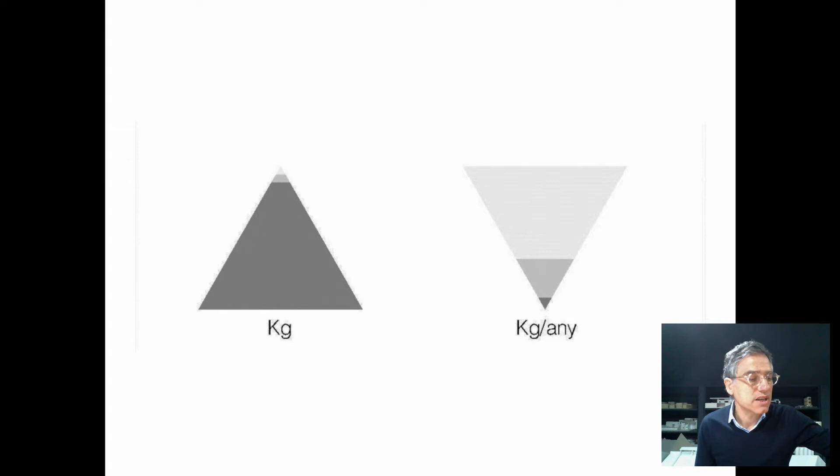But if you do the same calculation for the same house, not for an instant or just a moment, but for a year—which is the meaning of 'any' in that diagram—the calculation completely becomes the inverse, because the solid part of the house is always the same, but the liquid part is renewing all the time, and the same with the gaseous part, like the air, which is changing all the time. Maybe it's a silly diagram, but it's a good example to express the importance of time, not only in thermodynamics but in everything. In fact, without time, nothing exists.

And I think that if you introduce the idea of time in architecture, maybe we are getting closer to what is the invisible in architecture. Because through photography, I have the sense that you're just catching the instant, just catching a moment. And for me, this is the key—there's something out of the photograph that is difficult to define, that is about the invisible, but it's about time.

Just to present some vectors that I imagine can express the idea of time in architecture—for me, the first vector is people behavior, people performance. People performing in architecture is the first concept of time and architecture, which has high importance in the aim to define what is invisible in architecture. People performing is a very important part of that invisible part of architecture.

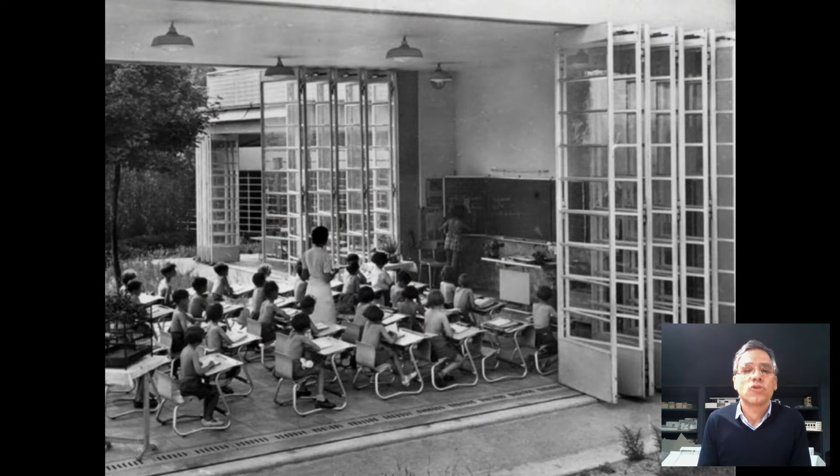Natural conditions performing—wind, breeze, natural conditions and physical phenomena performing—is also an important part of that invisible in architecture. And of course, architecture performing with physical phenomena is the third part that, as a triangle, maybe can define a little bit the vectors of time, and are close to being the sides of this invisible in architecture.

People performing is, for me, the first. When we are projecting, we are not projecting objects—we are projecting people having experiences. We are projecting the performance of everything. That's what we are projecting.

Then we define conditions, and at the end we take decisions basically about matter and geometry. We are organizing matter, but the projection, the preview that architects are doing through the discipline, is about the happening of the experience.

And in fact, not now, but at the beginning of the office, we were more or less well known in Barcelona because it was supposed that we were an office concerned about sustainability—but not because we were using passive and active strategies, or biospheric materials, but because we had a previous basic strategy about sustainability based on the idea of the use of the object. What is sustainable or unsustainable is not the building itself, it's how we use the building.

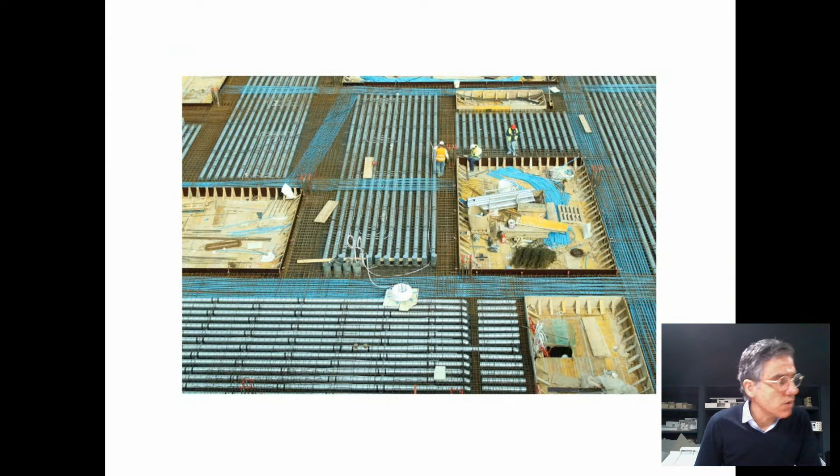Not only in outside spaces, which are an easy way in a warmer climate like ours, but also through sun gains and so on. The third aspect I was talking about is building performance, the building taking advantage of its natural condition, its nature. In the nature of certain structures there is inertia, so use the inertia. In the nature of certain materials there's natural insulation, so use that.

So by using the nature of the building, you manage physical phenomena also in that third aspect of the performative in architecture. These three parts that are talking about time are also talking about the invisible. Of course, there is the memory.

If we are talking about time in architecture, the fourth vector is the idea of memory. In our case, and I'll talk about that a little later, our relation with heritage, our relation with memory, our relation with the pre-existing, is very based on the idea of the attributes in the pre-existing. The first step in order to give value to the pre-existing, to the memory, is to ask that organized material that is already there to perform, to be part of the new construction.

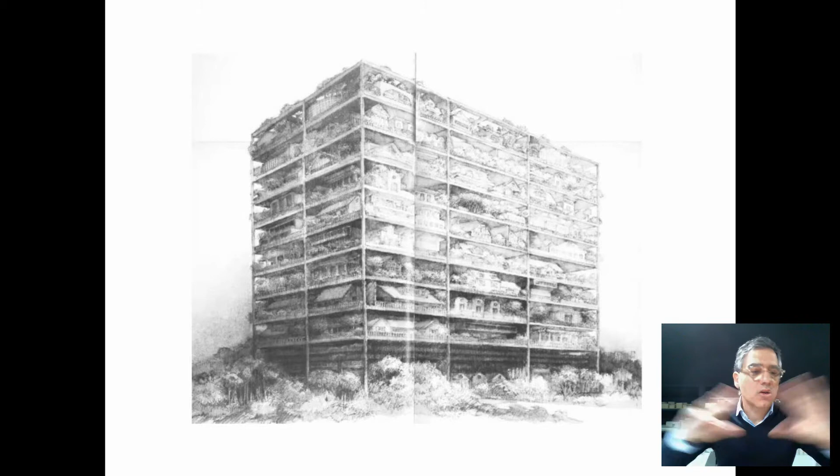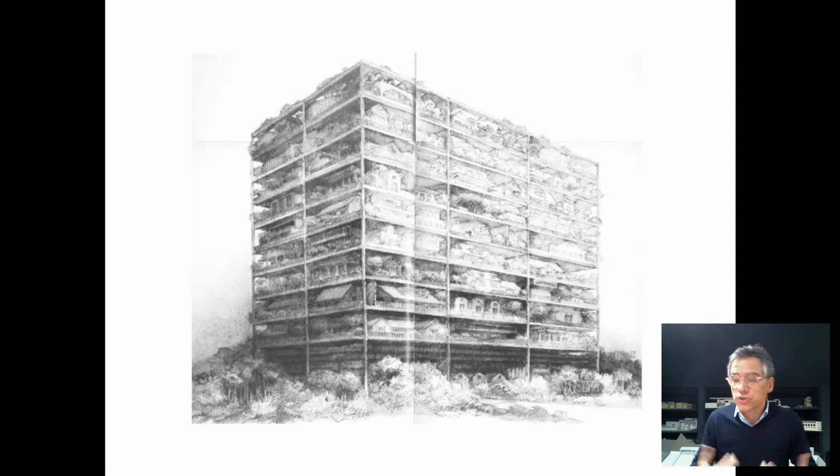I'm sure everyone involved in the discipline is always getting demands and managing availabilities to give a solution, to give an answer to those demands. In this difficult, complex equation that is the projection process, we are using construction and organized matter to arrive at the solution.

What I think is more specific about our personal approach is that from the very elemental parts of the buildings—structure and envelope, a structure to support the living performance, an envelope to protect the living performance from the outside—we ask those very elemental parts to perform in as many possibilities as possible. We ask the structure not only to support people, but also to produce comfort through its inertia, to produce acoustic comfort through its geometry, to manage natural light, and to hold the pipe system.

So we are asking the elemental parts to use all its behaviors possible, because the behavior of the structure is not only to support. If you design that structure through deeper research, you will find a lot of behaviors, a lot of attributes that can be assumed by that part of the building. Of course, we're not always able to answer all that demands with these two basic parts, but we try to.

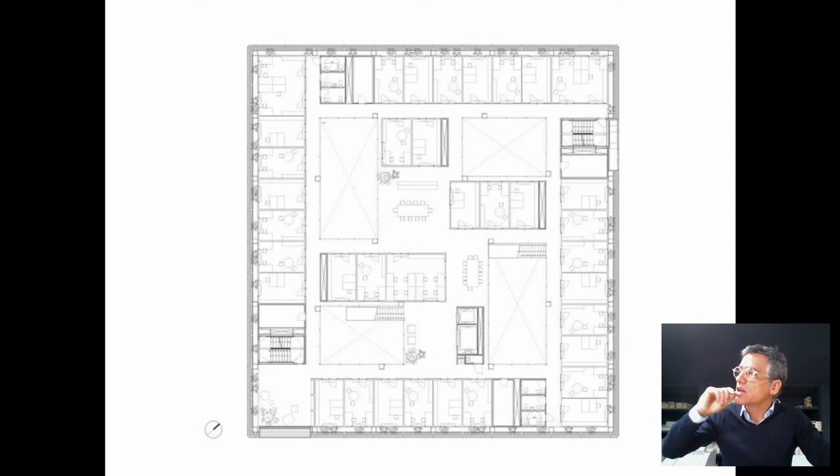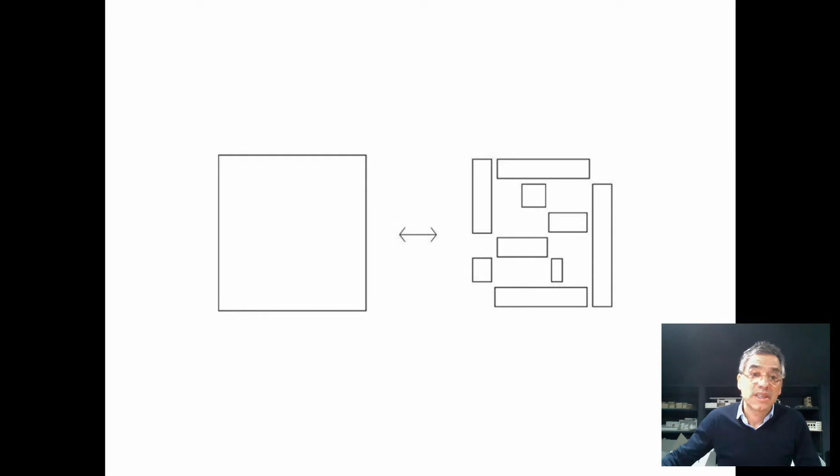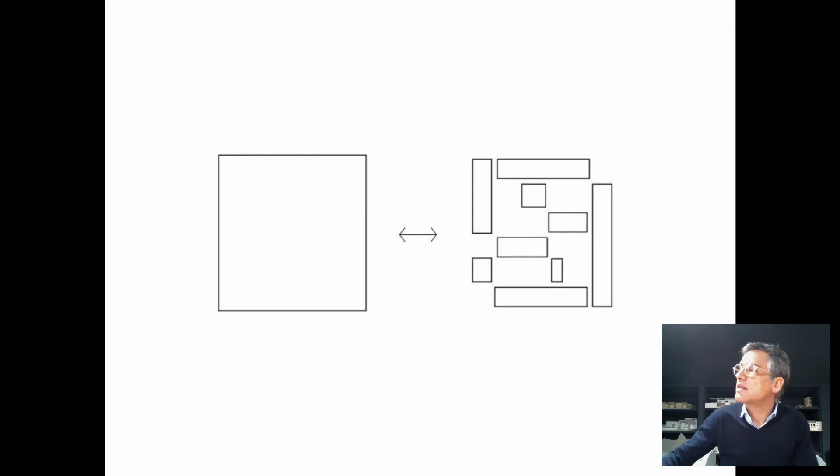This is just to explain a very simple concept, based on the idea that in wintertime it works as a very closed box, getting as much sun gain as possible, and in summertime the envelopment works as a porch. It becomes completely open, turning into that box-in-box system where the skin almost disappears, in order to produce a high level of cross ventilation. So in summer it's completely open, also working as a shade system. In winter it's closed in order to become a greenhouse.

So this is a clear example of the performatics in building, the performatic part of construction. Not of architecture, because performatics in architecture is about people, about natural conditions. This is a clear example of the performatic part of the construction.

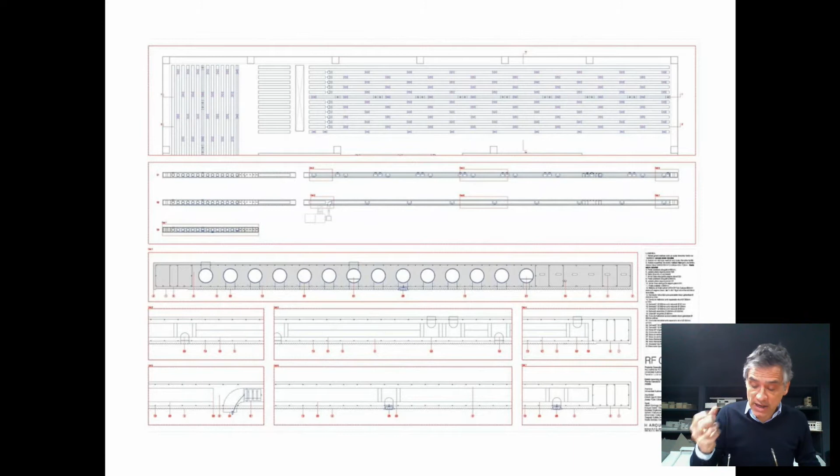So the structure, which is a heavy concrete structure - we assume that the building has these two parts: the structure, which has to be there for 100 years, to have a good relation in terms of embodied energy. And on the other hand, the envelopment as something easy to be renewed, easy to be changed in the near future. But the structural part, that heavy concrete structure, is not only there to support people.

It's also there to hold the pipes that renovate the inside air, which also helps make it lighter but with a high level of inertia, because this is a 40 centimeter slab, and that inertia helps stabilize the inside temperature, along with all kinds of pipes for other systems.

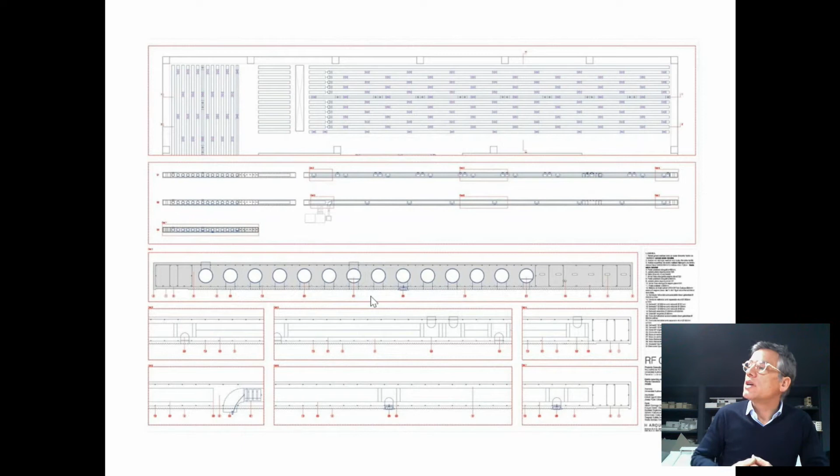It's just to understand that idea - it's not just a slab, it's also a geometry that, because of the irregular surface at that site, helps not only with inertia - this silhouette gives double surface area in terms of heat interchange for the inertia - but it's also helping to absorb a bit of the noise.

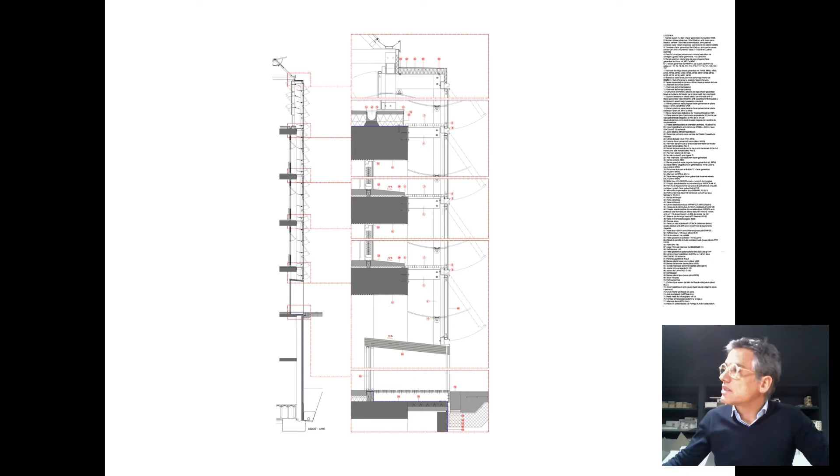And on the other side, that skin, that envelopment, which is the other elemental part of the building - it's not only a rainproof system protecting you from the rain, it's also a system that works as a greenhouse in winter, works as a shade in summer. It can be open, it can be closed. It's producing those situations, but also producing those moments.

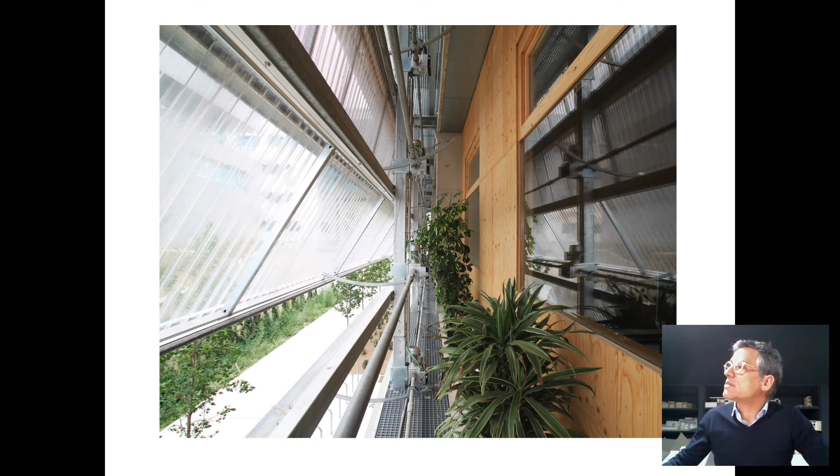Here we can see how the slab, because of the texture, becomes not only better in terms of the inertia system to stabilize the indoor temperature, but also helps absorb the excess noise.

The greenhouse became a real greenhouse at the highest level, because I haven't explained that this research center is about that kind of technology - it's an environmental research center, so they do that kind of fun research. So the greenhouse effect became a real greenhouse on the top level.

As I've explained before, our position in front of heritage is that, of course, we are concerned about composition and about the cultural dimension of heritage, but our first approach is always trying to discover the real attributes, the already-there attributes of that organized matter. I sound a little like a surgeon, very cold, but I have to say we also have that emotional approach to heritage, while being as objective as possible in order to understand its real attributes, to help it become part of the new organized matter that will be the future building.

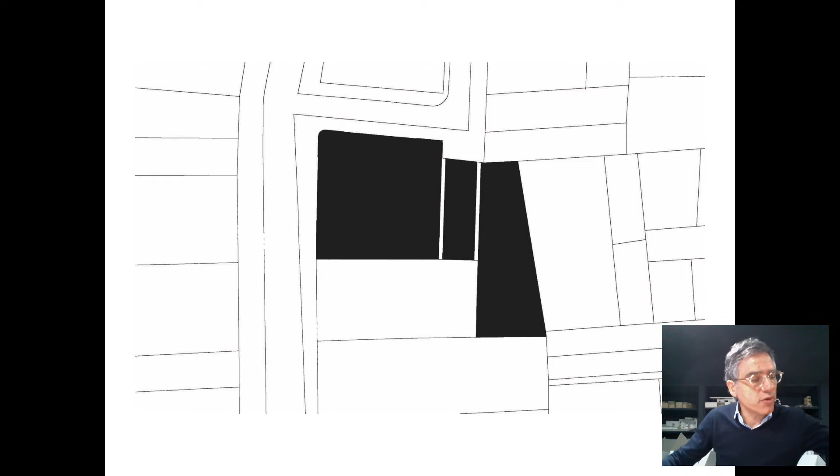In this case, this is an old cooperative building for workers in a crowded neighborhood in Barcelona. Apart from the historic attributes, the beautiful history that it was made for workers, by workers, paid by workers, it was also organized matter able to work in terms of structure—the walls were still able to hold up, to stand the new slabs, maybe a new roof, and so on.

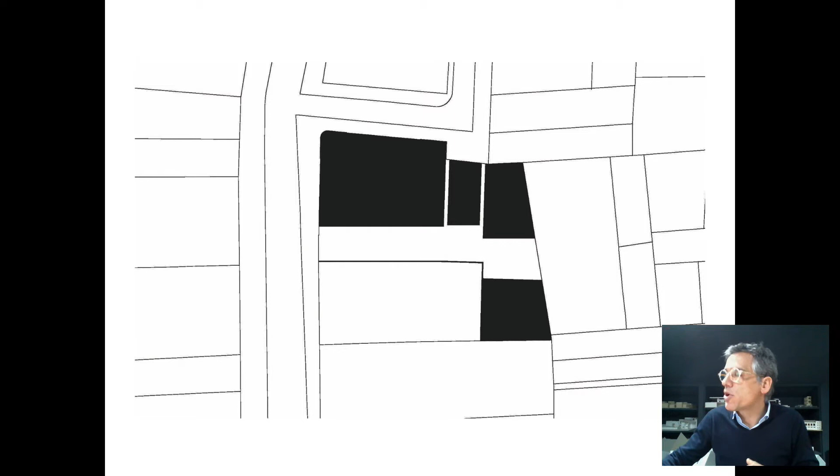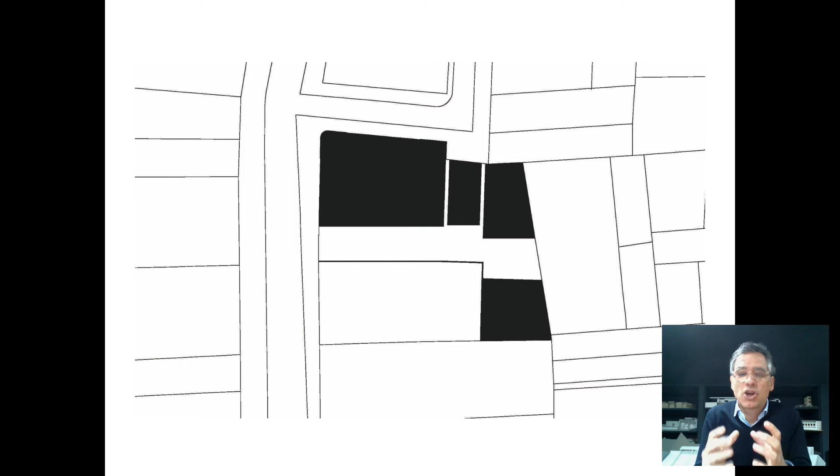So the first question wasn't about history. It was about what part of the building could already assume new heavy programs, new weights. From that, the first decision was to demolish a part, not only for structural reasons but also geometrical reasons, because geometry is also an attribute of heritage—geometry in terms of whether, because of size, the heritage is able to assume that program or use.

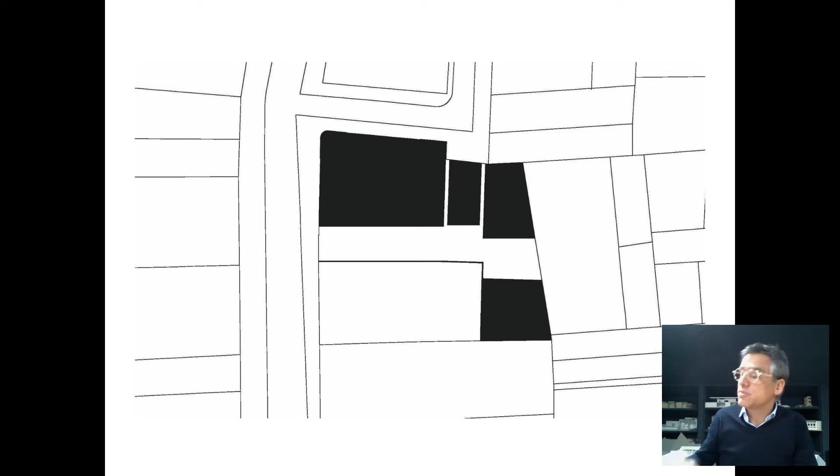So from those two approaches, structural performance and geometrical attributes, we decided to demolish that core, that central part of the building, producing a new patio to completely change the circulation and the behavior in terms of thermodynamics, while keeping the spaces still able not only to support people but also to assume new uses as a theater, a small concert hall, multi-purpose halls, classrooms, and so on.

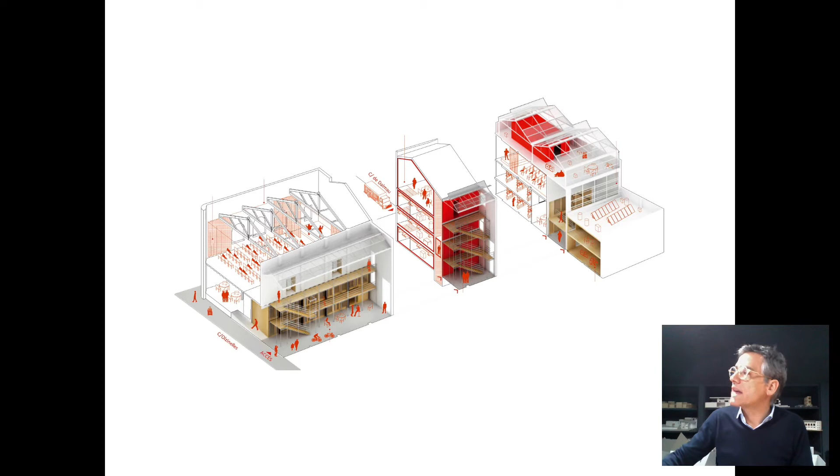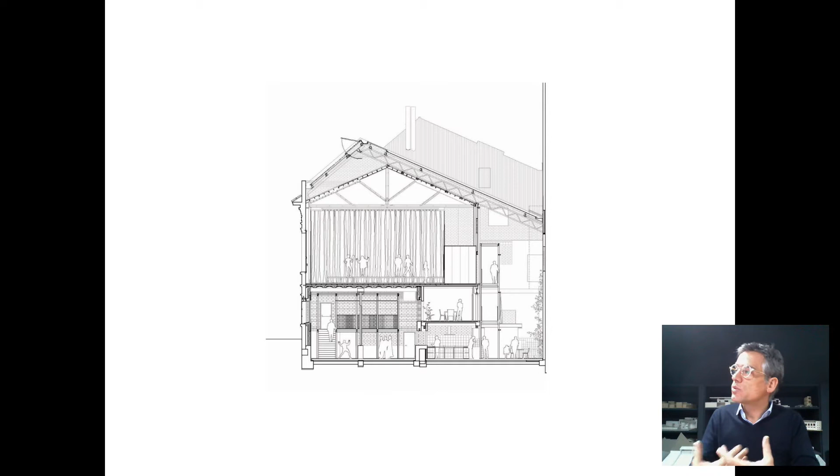This is the section where we can still see the original parts on the left side and the new patio covered by a bioclimatic roof, producing intermediate spaces in symbiosis with the indoor spaces. The theater has to be absolutely insulated in terms of noise, but the primary air of the theater goes to the intermediate space to produce natural convection, because the roof works as a natural engine.

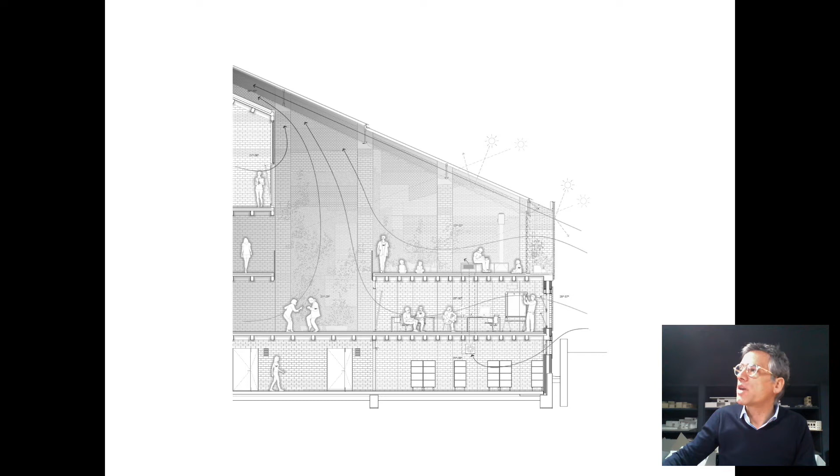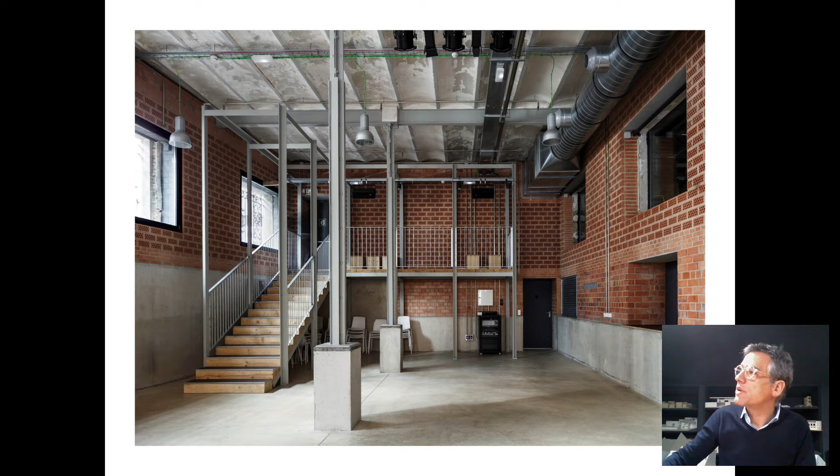This is the kind of intermediate space we are producing by demolishing part of the building—absolutely bioclimatic spaces working by natural engines. This is a beautiful experience in the very center of Barcelona, and we've been honored with several prizes for this building, which is called La Lleialtat Santsenca.

The intermediate and the indoor—this is the old main hall in the original cooperative building, which has now become a theater that needs a lot of curtains to close everything, but in terms of geometry and structure, it's still able to support the new use.

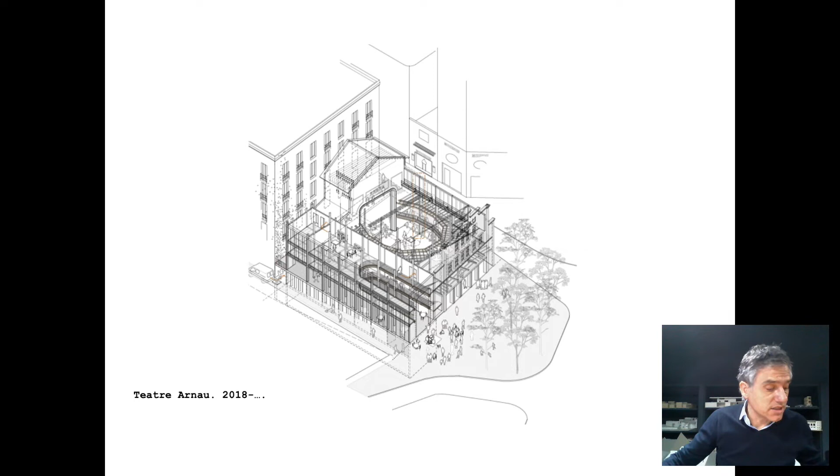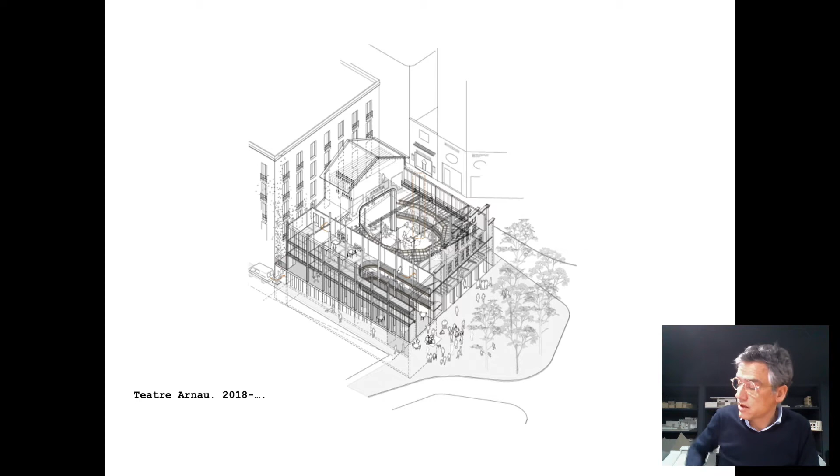Now we have finished this project for a new theater in an old theater in Barcelona called Teatre Arnau. Because of the pandemic, the process has been stopped. We're supposed to be building right now, but it's been halted because of the crisis. We don't know what will happen in the future, but I think it's an interesting project in order to ask something else of that preexistence—to ask it to also perform about this invisible, producing a dense atmosphere.

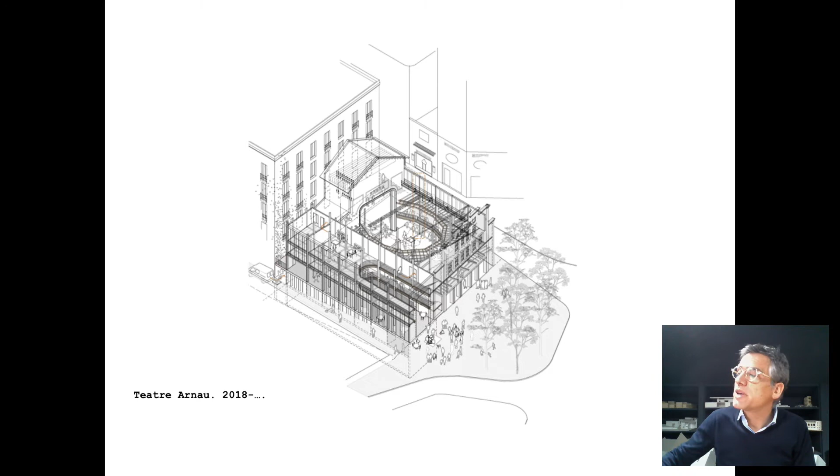In this case, it's not about structural performance, because the structure of this building—a very famous theater in the old theaters avenue in Barcelona, Paral·lel Avenue, close to the port—was once an avenue full of theaters, music halls, and cabaret places. But the construction system for those theaters was very basic.

It was very close to the kind of construction used in port logistical buildings—very simple timber structures with light steel beams, something very light that was built in a short time because of money and legal concessions. The Teatre Arnau is the last theater still standing on that famous avenue in Barcelona.

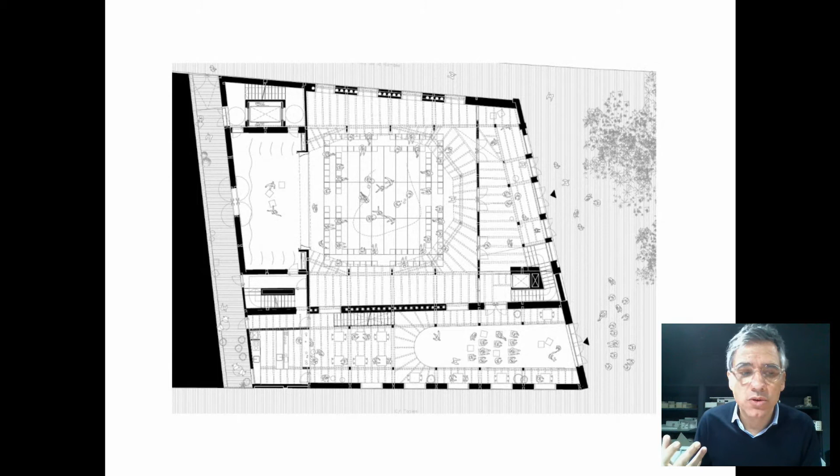So we were very proud to win the competition, and our project was basically to get a new use for the timber structure, which is characteristic in that kind of buildings. But as the timber structure was absolutely out of order and not able to be used again to support something, we decided to reuse the timber structure, the wood beams and so on, in order to produce two things.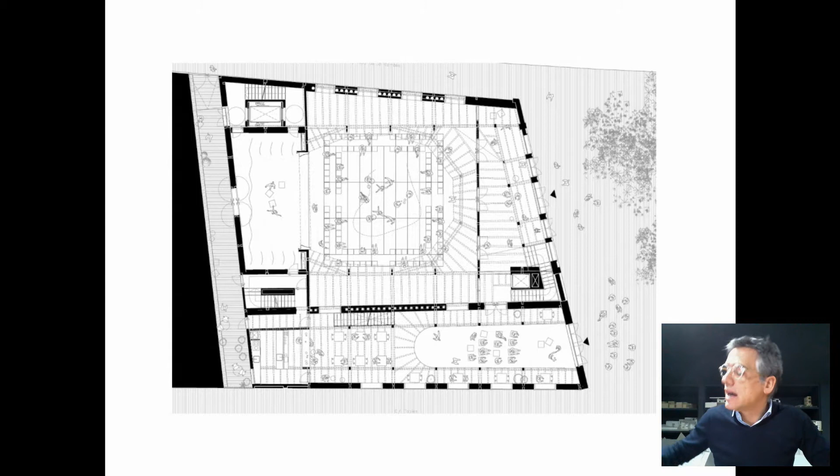In the inside, a new kind of atmosphere. Because of the program, it's not necessary to use the second and third floor of the theater, and we prefer a multifunctional basement floor. The second and third floor have been partially demolished just to keep the structural part, that timber structure, in order to produce a spider-web-like group of lines floating in the space, recognizing the original geometry of the theater, giving that cultural dimension.

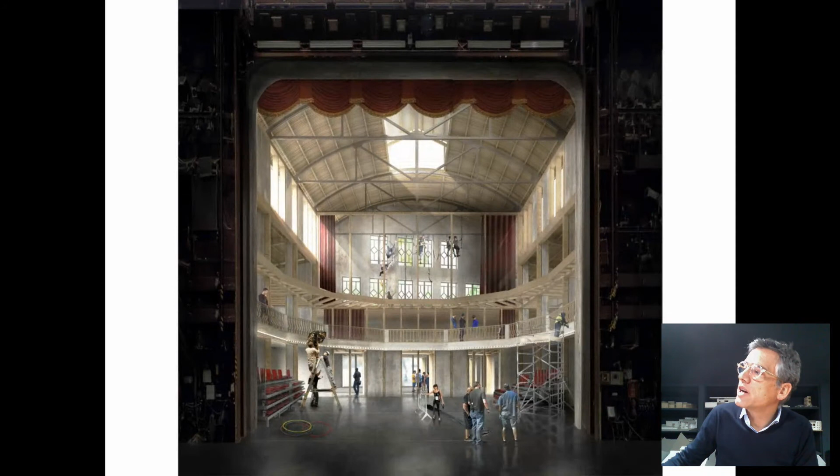So we are doing that naked process to the timber structure to produce that beautiful atmosphere, because of those beams, timber beams and lines, like floating into the space.

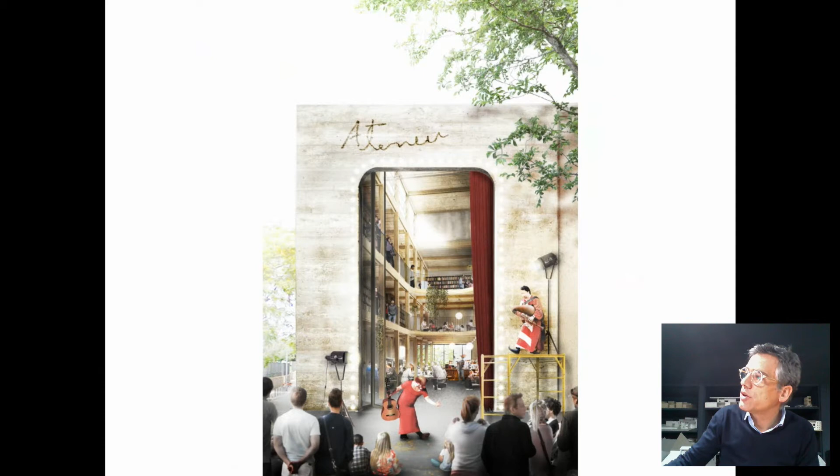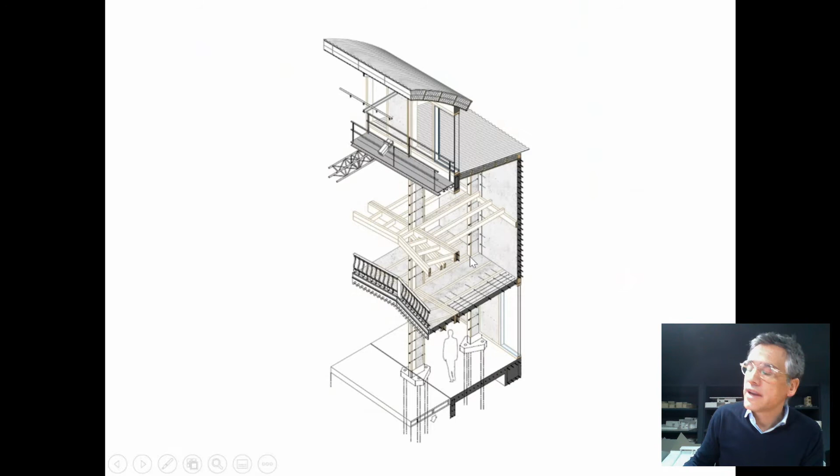On the other side, we've done a new cultural center close to the theater, and the second performance we're getting from the original timber structure is that, as it's not possible to use it anymore to hold up and stand up the new structures and new uses, we will use the vertical timber columns as the precast system for the new concrete walls that will be the new structural system.

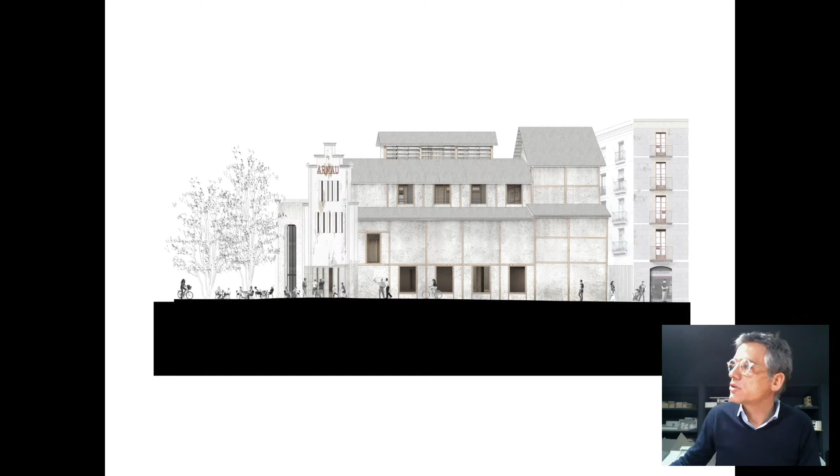So, well, I think this drawing shows it -- the old columns and timber beams will be the new precast system, used to produce the new precast concrete walls, giving that game of textures not only in the facade but also inside the theater.

Well, I don't know, maybe I'm doing it too large, but just two strategies more, two concepts more, before we end -- that fluid, what we call the fluid matter.

So if you remember the diagram that I've shown at the beginning, talking about the importance of time in architecture, and that idea of how because of time we discovered the importance of time through the diagram -- because suddenly, when you calculate the weight of the building, the air during a year becomes the principal part in terms of weight in a building.

It's not just a silly diagram, it's a real thermodynamics diagram that expresses the importance of managing the air -- not artificial air, but natural air that comes from outside, that you have to manage, that maybe you have to treat, maybe make it warmer, but you have to use the natural conditions to take advantage of the nature of the construction to produce that indoor comfort.

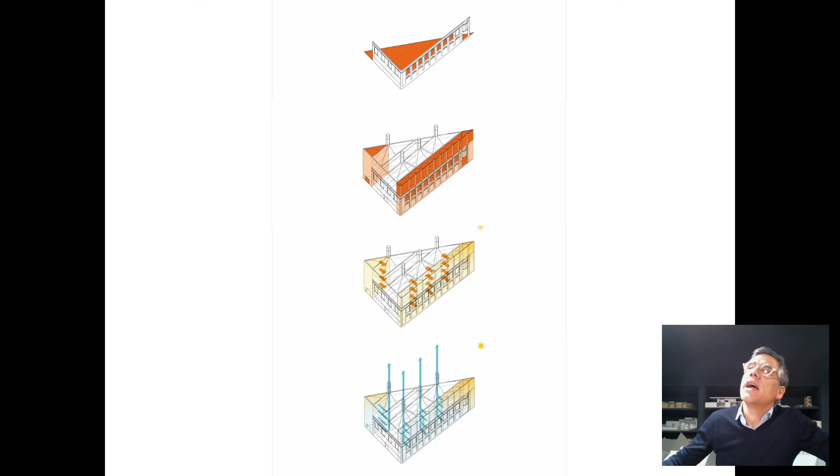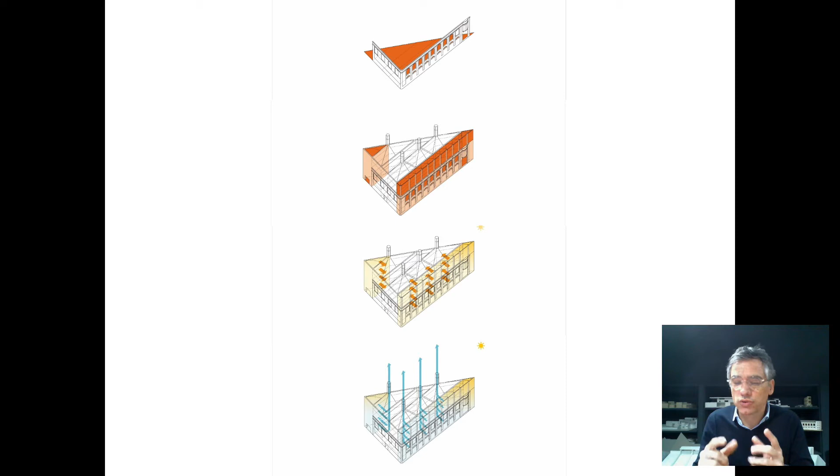The nice part of this building is to explain how such a very Euclidean, very clear structural system is not just a system of parallel walls -- it's basically a construction system designed to give conditions to the air. Not only to give temperature, to control humidity, but also to manage the speed and movement of the air.

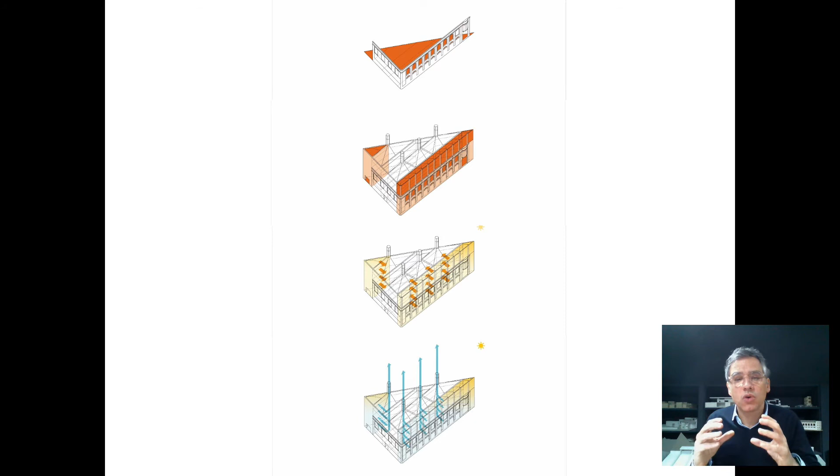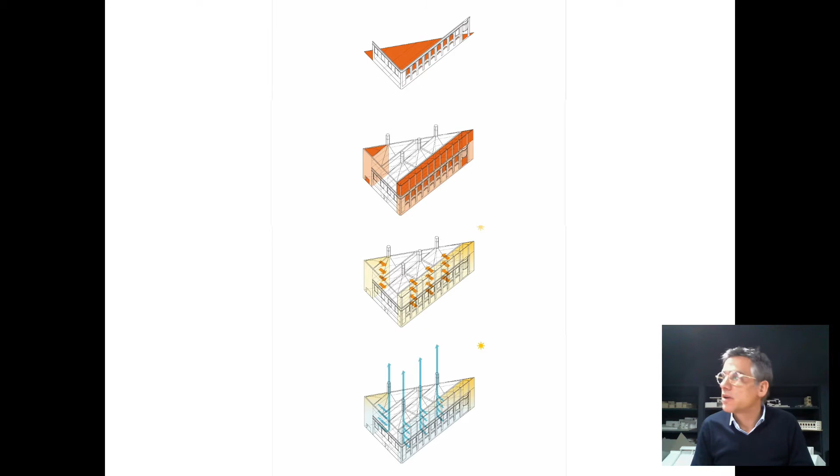So this is not just a building based on inertia, it's also a building where the system to move the air, in order to get the number of renovations enough for the health inside the building, is done through a natural engine -- those pyramids in the roof, which are very powerful natural sun chimneys.

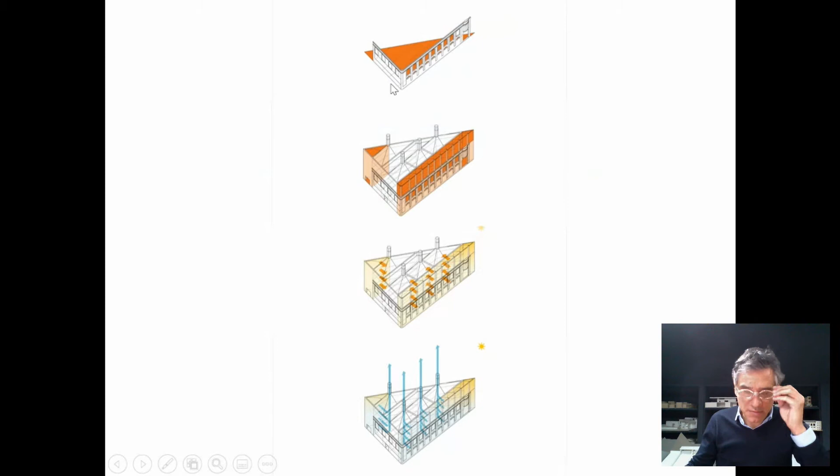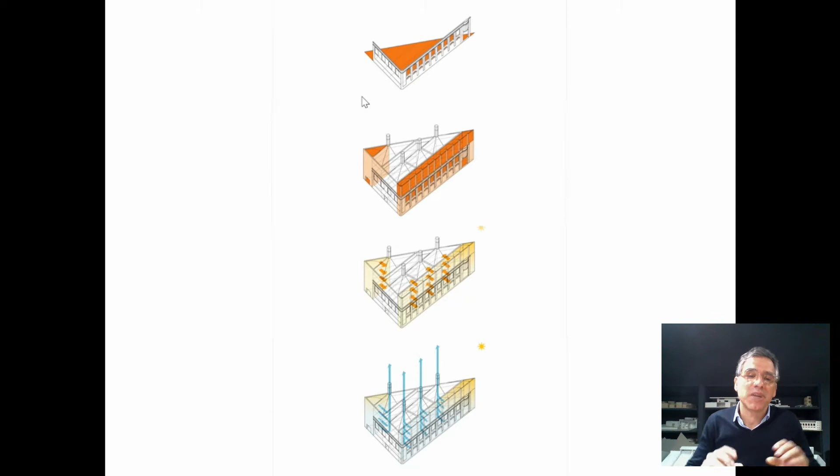Well, just to explain a little bit the strategy in terms of architecture -- this is a very strange shaped plot with a triangular shape in the Sants neighborhood in Barcelona. Because of an old factory that used to be here in that area, there's a protected facade that has to be kept in place, a beautiful old facade, based on a compositional system to be a factory as it used to be. So in terms of height and proportion of halls, it was absolutely difficult to manage in order to place behind there like 18 classrooms.

So we decided to do that 2 steps behind strategy, placing the new facade about 2 meters behind the old facade, in order to get a courtyard, a patio to manage the natural light conditions for all the classrooms, and not be restricted by the former facade geometry.

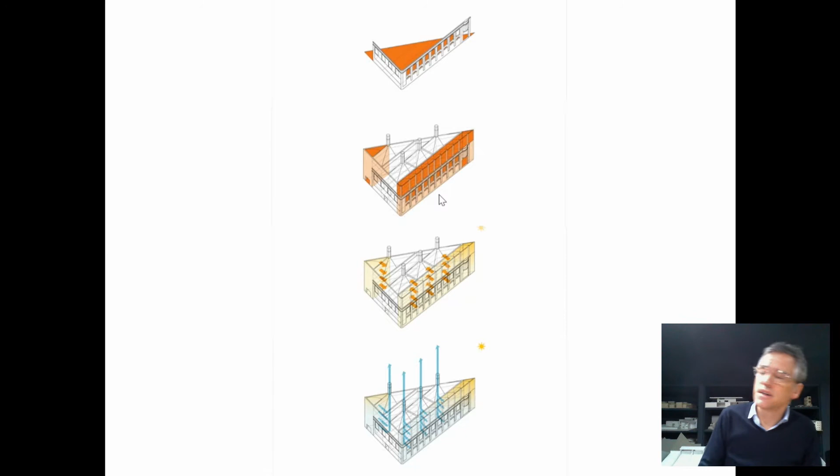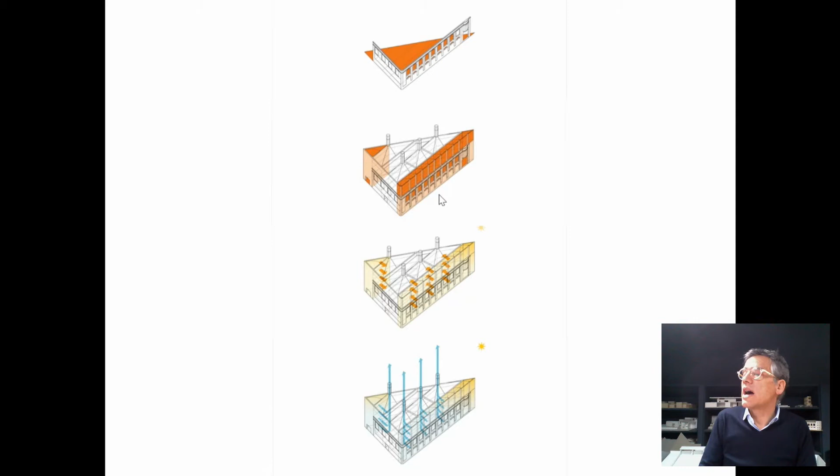Then we decided to transform the patio into an atrium in order to pre-treat and give conditions to the primary air for the ventilation system, and also to become an open patio for summer conditions.

But the interesting part of the building is the natural engines, in terms of getting sun gains to give warmth to the outside air, and to produce sun chimneys in the roof in order to move the air.

So in general we give energy to the surfaces through the walls, in a passive or active system, but in this case we tried also to give conditions to the air by moving it. This is a structural wall system, in this building, in order to get as much inertia as possible inside.

But this very Euclidean plan is not only about making a facility for classrooms as clear as possible - it's also the way the structural walls give shape to the air that goes from outside to the courtyard, and through the courtyard, through the classrooms, to the roof, following the geometry of the structural walls.

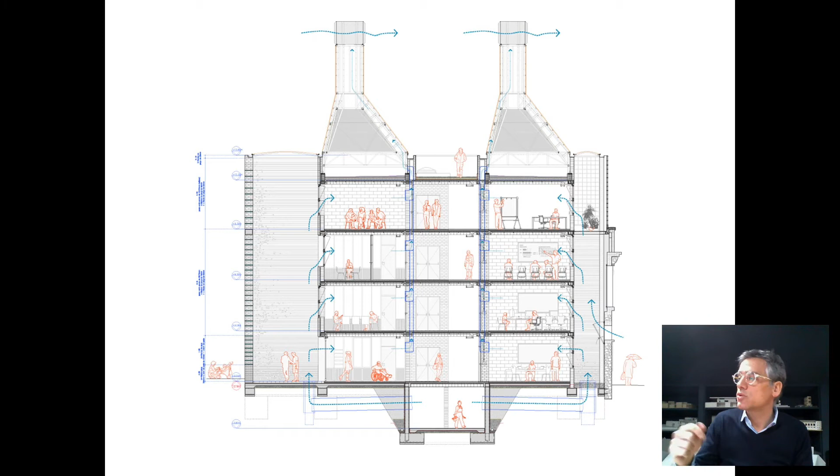And we are doing all this with that natural engine. We are doing all this also with a high level, not much of engines, but a high level of monitoring systems to control that we are really meeting the standards necessary for that kind of facility.

So this is the north courtyard, working the same as the south courtyard, functioning as an atrium in winter and patio in summer, as a pre-treatment before the air crosses the classrooms.

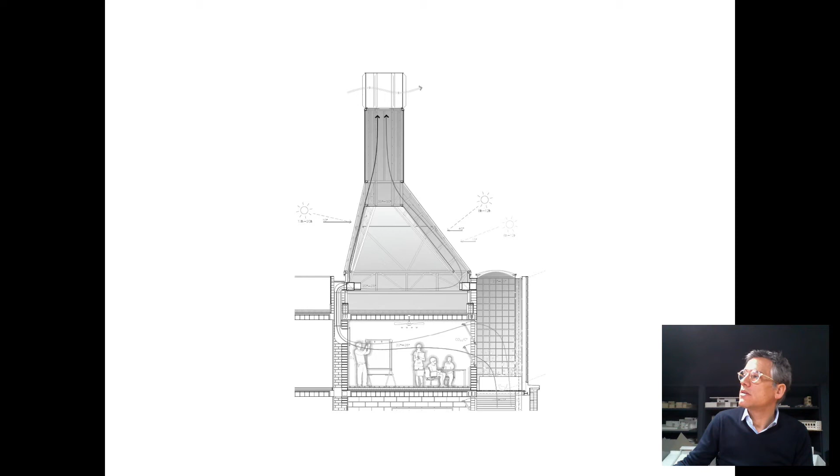And that's the natural engine. That was a funny research process that we did using simulations, and it was a very interesting process, based on natural phenomena, on physics phenomena, but it needs more than engines - it needs a lot of engines in terms of simulation and a lot of hours to close all that.

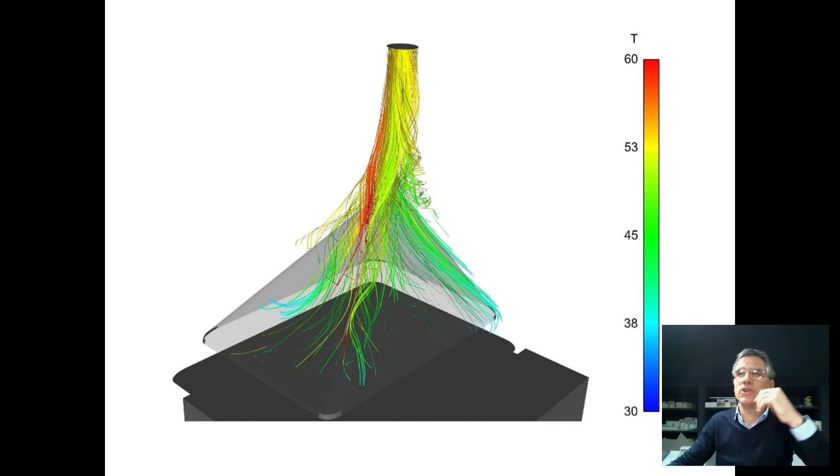We closed it into a nice design that works also in order of culture, because there's a tower behind the building that used to be a factory. So we try to do what in the office we call a round project, when we achieve to put all this together - not only the thermodynamical dimension, but also the cultural dimension and the construction dimension.

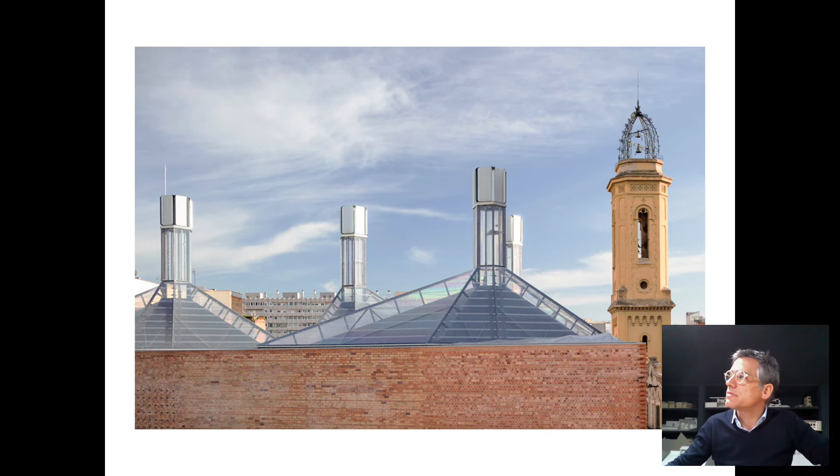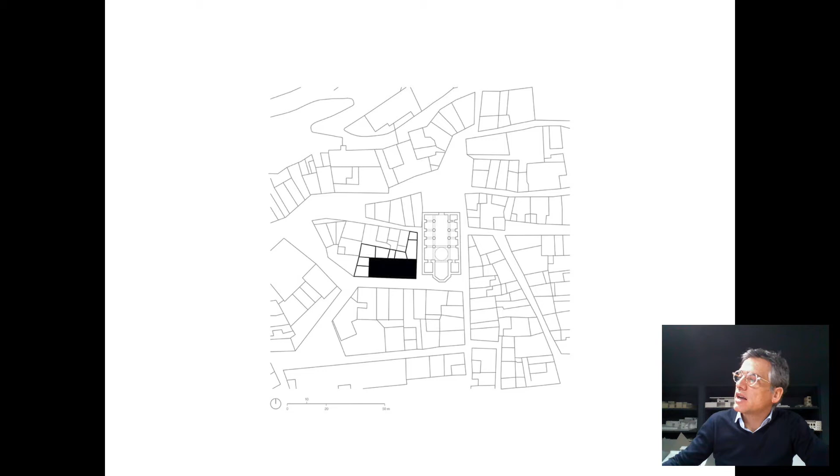This is a nice winery that we've just finished last year, so we've just got the pictures now. This is a winery in the south of Catalonia, in a very nice small town, close to the church. We got that commission to build a winery inside the town, which is typical in that town, using 4 or 5 former house plots.

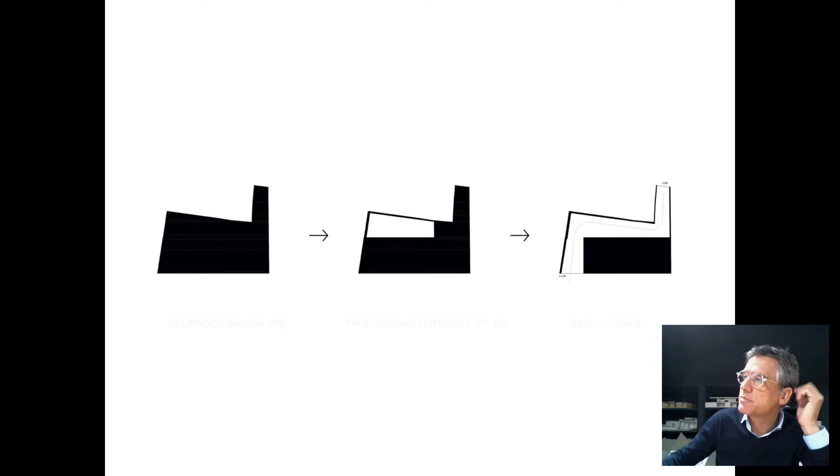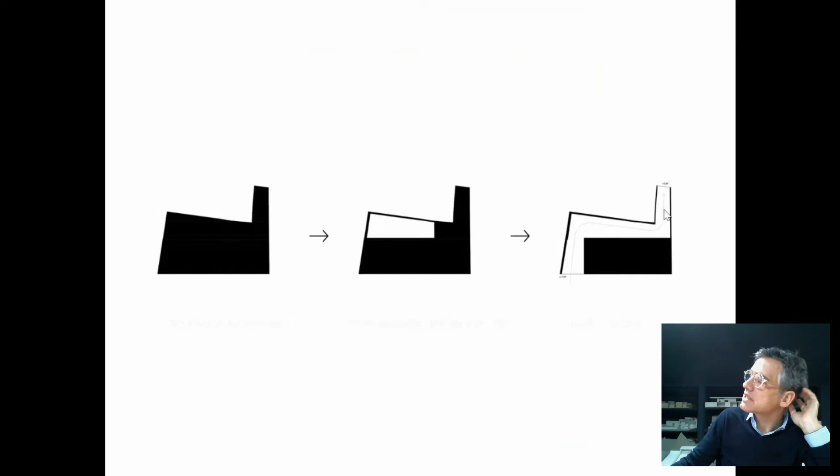The geometrical decision was very simple because of the general plan of the town. We had to produce a kind of inside courtyard to get distance from the neighbors, but we decided to make it a larger courtyard - one with conditions to be not only a courtyard but a multi-purpose space, with outside conditions but protected from the rain, in order to be a logistic space for the grapes, but also a representative space for visitors and so on.

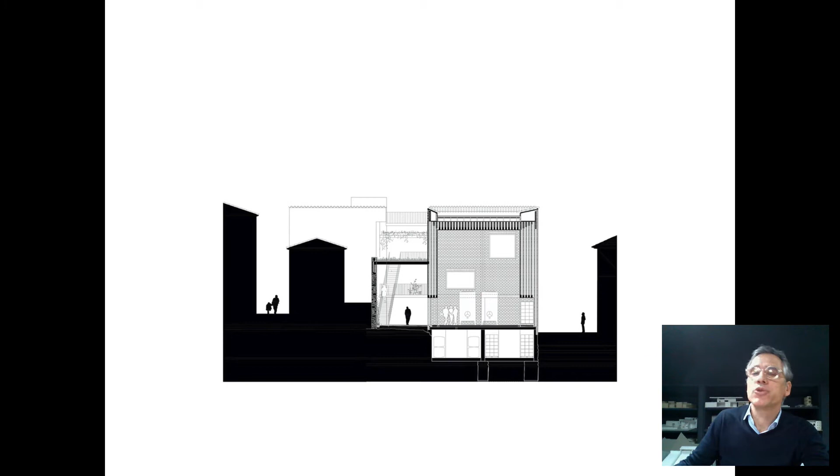So that's a section of the building, and it's also an example - I think an example of a lot of things, but I'm explaining it in the aspect of the fluid matter and the importance of air in architecture, and the construction of that invisible part of architecture. In terms of thermodynamics, it's obvious when we are talking about the invisible - thermodynamics is about giving conditions to the air.

Thermodynamics in architecture is about how I'm using geometry, attributes of the matter to produce comfort conditions, and so the air is an essential part of this design in architecture.

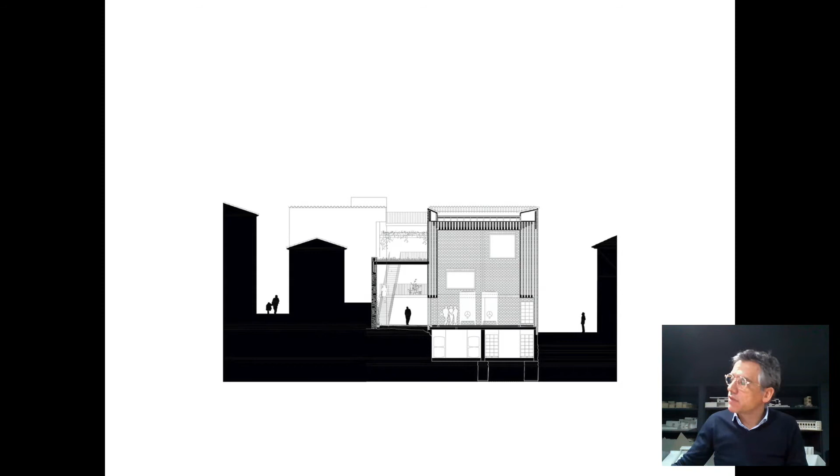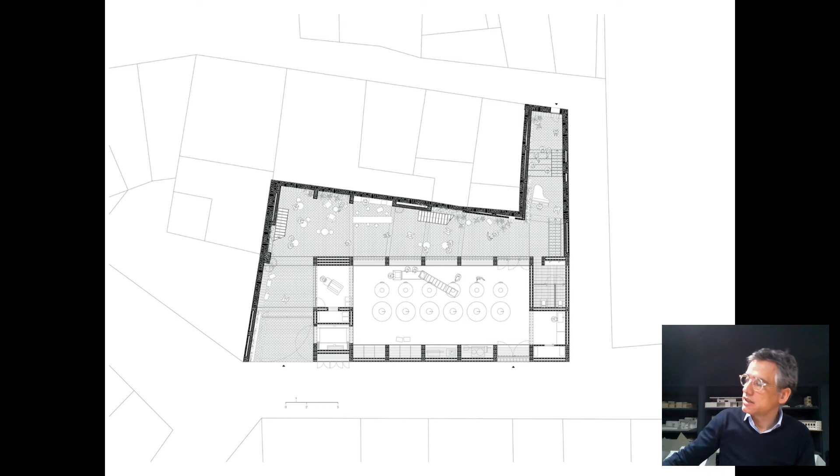In this beautiful building, I want to explain that the heavy walls are not only producing inertia to make the inside temperature more stable, but here we can see that courtyard that surrounds the bathroom. The bathroom is in the middle. The courtyard follows the former geometry of the plots, producing that intermediate space, getting sun from the overlap of the slabs.

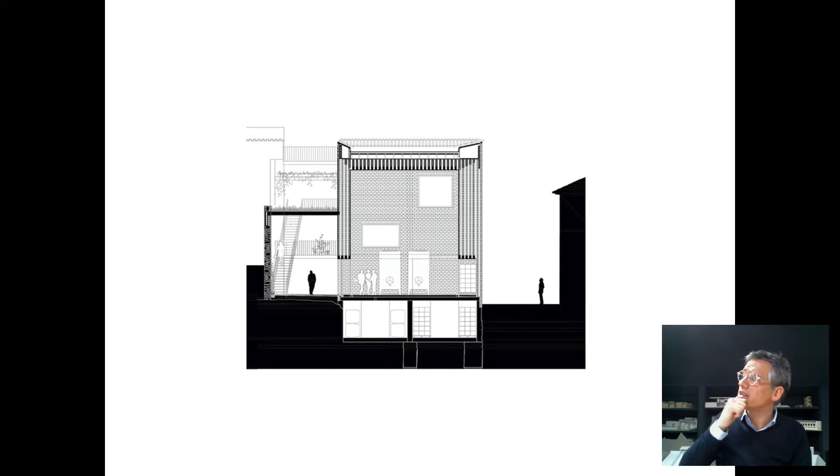In the middle we have the bathrooms upstairs and the cellar downstairs in the basement. All the building is made not only by bricks or structural walls, but by multi-layer structural walls that work as beams in the roof and as structural walls in the frame of the plan.

This is because we are trying to produce a very interesting thermodynamical effect, which is that through convection, the air goes down through these multi-layer walls and goes up in the inside space. This is because in the roof we have a swimming pool, a layer of water.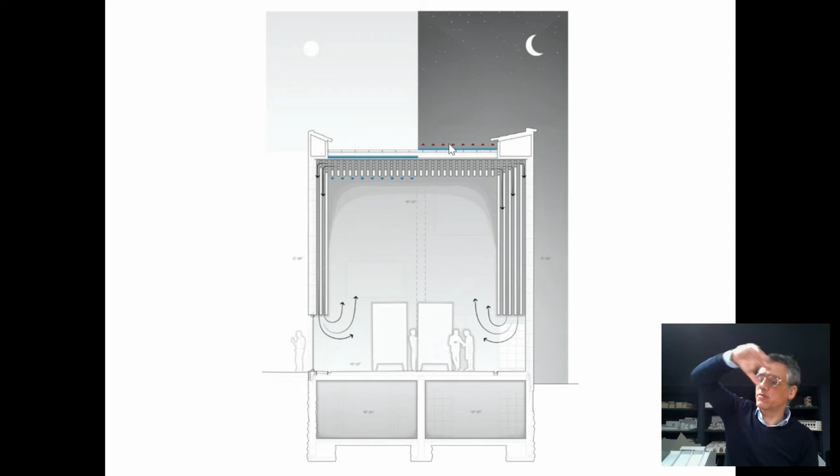During the night the layer of water goes up to get the cold from the sky, from the bóveda celeste, because the interchange with the sky tends to infinite, so you're getting a lot of cold even in summer time. During the day the water layer goes down to this inside interface to give cold to the air that is going up through the space.

It's a very simple convection, produced by this natural engine: place cold here, then the hot air goes up, gets cold, and goes down. Of course there's also cross ventilation with the outside when conditions are good, but the interesting part of the building, in terms of fluid matter, is that section.

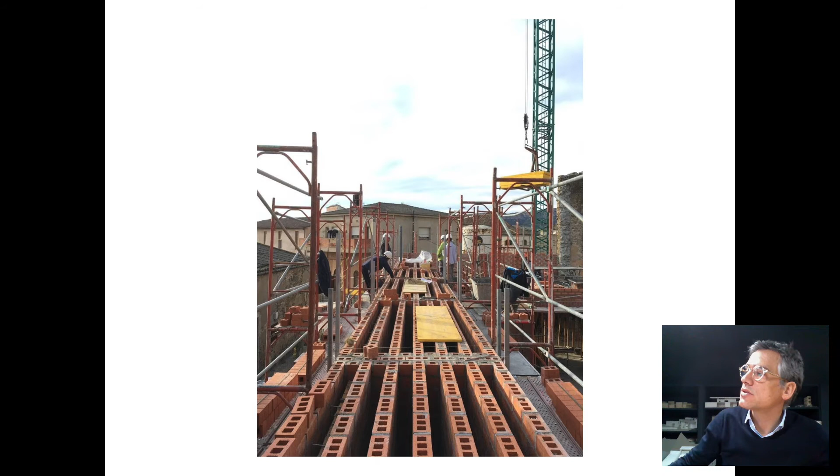This is also producing a dense atmosphere in terms of construction, because these multi-layer walls can be seen from inside and are beautiful. Here we can see the construction, and here we can see the pool in the roof.

To produce, and just to end, to give conditions to the fluid part of the building, you need the solid part of the building. You need what gives geometry to the space.

To explain that part, I always use that picture, a beautiful shot we got in a quarry in Mallorca. This is the typical limestone from Mallorca that we call mares, and this is a real quarry that was in use when we took that picture, and for me that explains very well that close relation between the solid and the fluid part in architecture.

How the walls, how the structure, is the best way to give conditions, not only in terms of support, but also in terms of atmosphere to the inside space.

Very fast, I mean, in that approach to that kind of structure that gives conditions to the air, that is producing architecture. How the structure is producing as much architecture as possible.

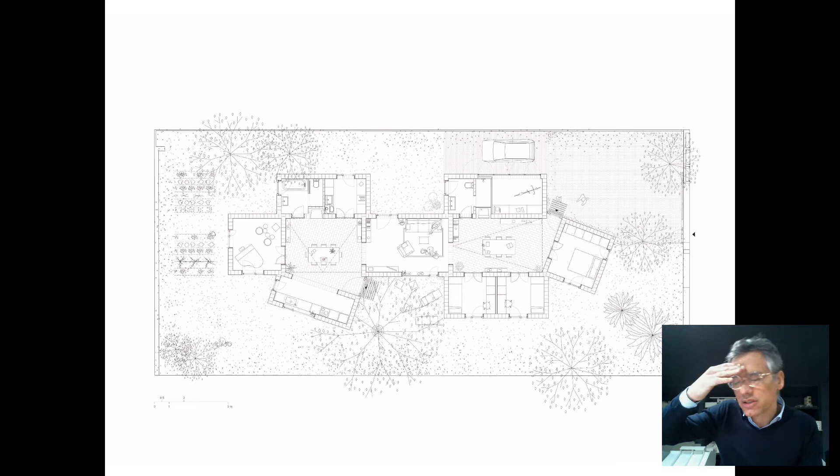We are trying also to be so old-fashioned that we are trying to produce this with just one material, which is something a little bit snob. I think that is too much, but when you are in that process, we are trying always to go a little bit farther and farther, trying to produce something new not just because of originality, but new in terms of essential. We are searching for the essential of this relation between structure and space.

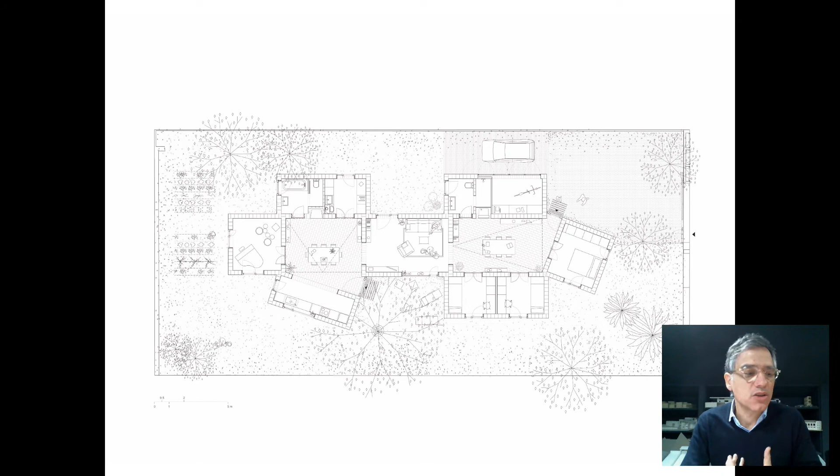That's why we are trying to produce that kind of, by the moment, houses, because for facilities it's very difficult to get that challenge: to produce with just one material a wall that gives not only rainproof conditions, but also the inside conditions, the insulation, everything in terms of condition, and also to define that inside geometry, to give special conditions, to produce special spaces.

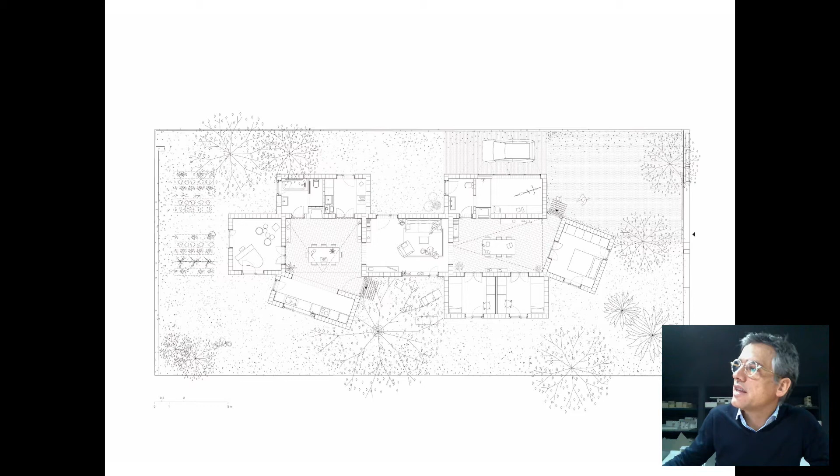This is a house in a beach area close to Barcelona, for a single family, based on that idea of cells surrounding an inside intermediate space that works as a sun gain space, and also a bit as a natural chimney in order to produce cross ventilation.

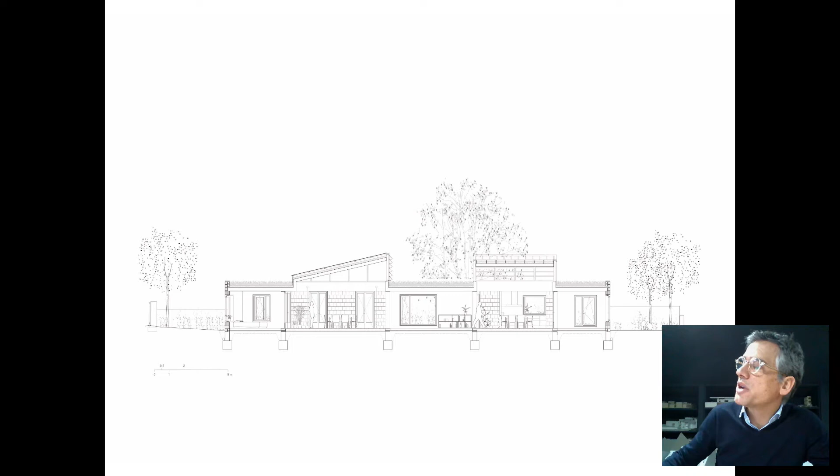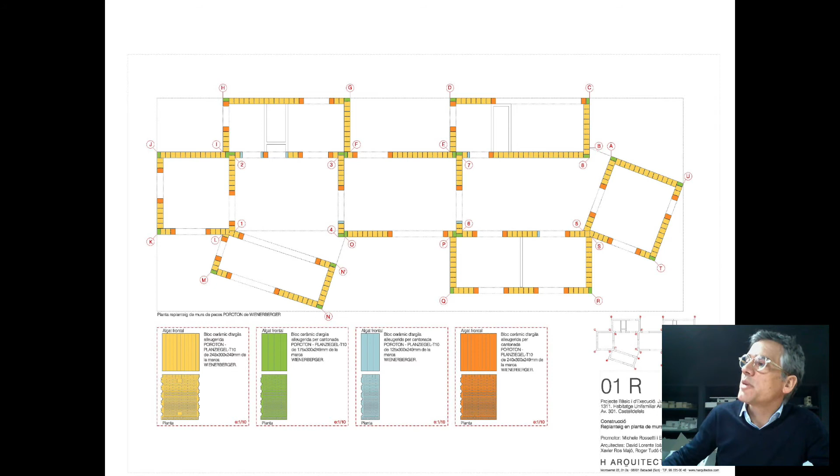The interesting part of this building is that it was the first house we tried to do with just one material wall, a Poroton brick, which has a lot of attributes. In this house it works as insulation, as structure, and as the geometrical definitor of the inside space, producing this beautiful image outside.

In some parts it has to be plastered, but that's the only extra layer the house has apart from the structural wall. And just to end, this is a house we did in La Costa Brava in North Barcelona, a beautiful area with nice villages and so on.

Just to explain a little about that final aim, which is to get that essential quality in architecture, that essential atmosphere, that dense atmosphere, that invisible part of architecture, we are also trying to find the essential in terms of construction. So how can we place into one wall not only the structural behavior but also the insulation behavior, the humidity control behavior, and of course the cultural behavior.

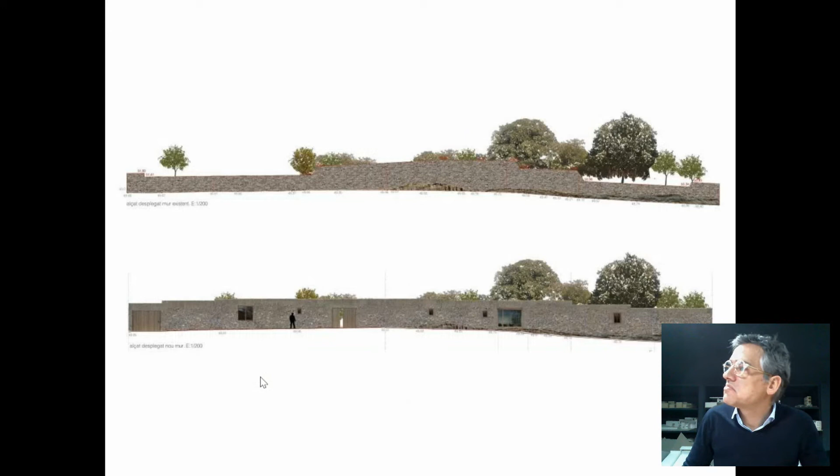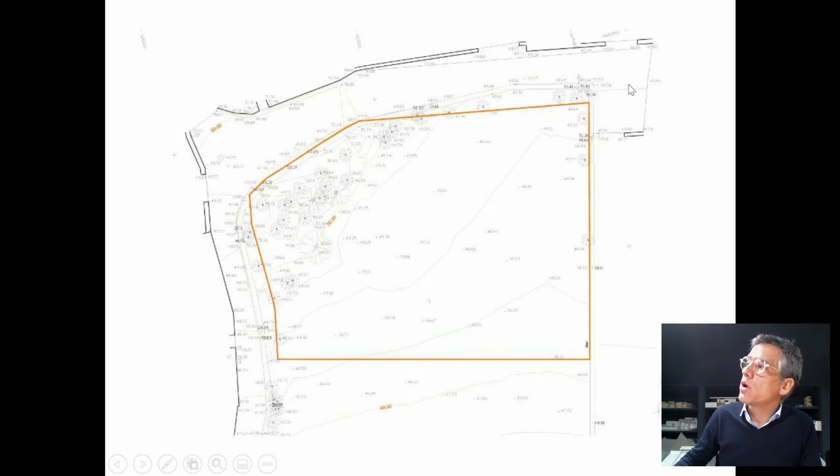So we decided to develop a very simple house just by attaching the weekend house to the former wall, producing a continuous porch attached to it. The problem was when we had finished the project, we went again to the council and they suddenly remembered that the street had to be widened for car circulation. This was very bad news, because the beautiful wall that was the reason for the whole strategy had to be demolished.

But we decided to keep the same design line, to try to produce that porch house made with a stone wall, giving a sense of geometry, a little like a cave, a little like a very vernacular construction, with wide walls giving thermal conditions, but also texture and color.

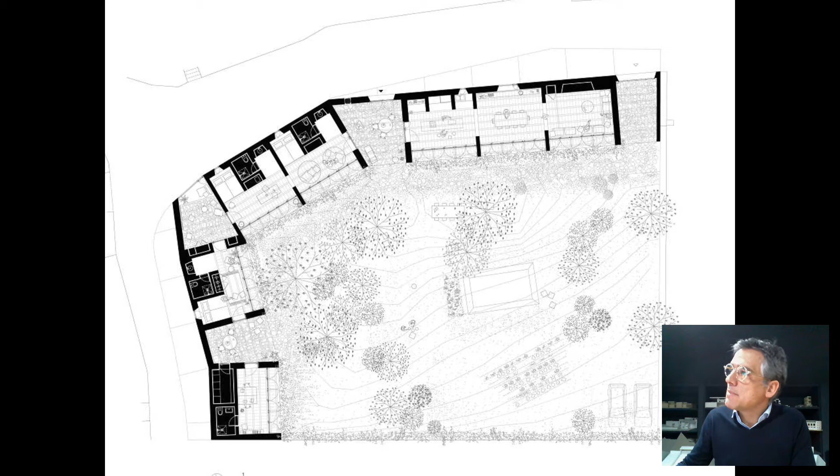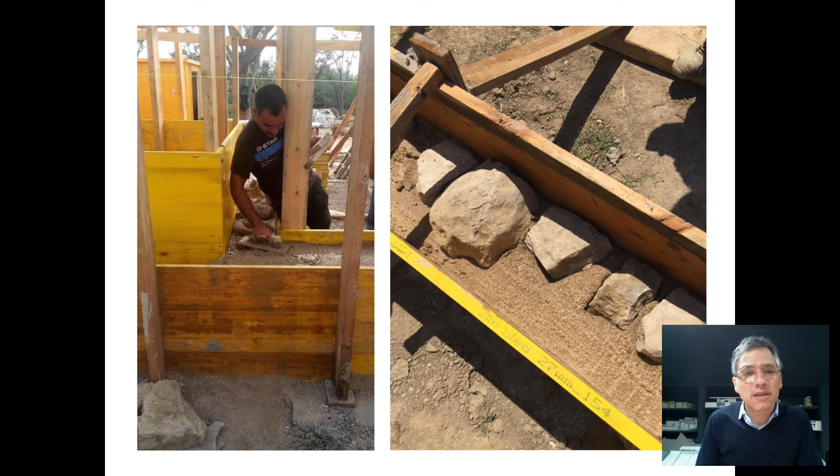We did it by demolishing the wall and rebuilding it in what we call cyclopic concrete. That means concrete made with the former stones from the wall, but without steel bars inside, using lime as conglomeration of the stones, made in a very traditional way, layer by layer, 10 centimeter layers overlapping.

Very wide, 40 to 60 centimeters, in order to introduce glass air balls to give insulation attributes to the wall. Of course this kind of craft work and simple construction can only be done with one floor construction, because it has no steel bars to work in flexion or traction.

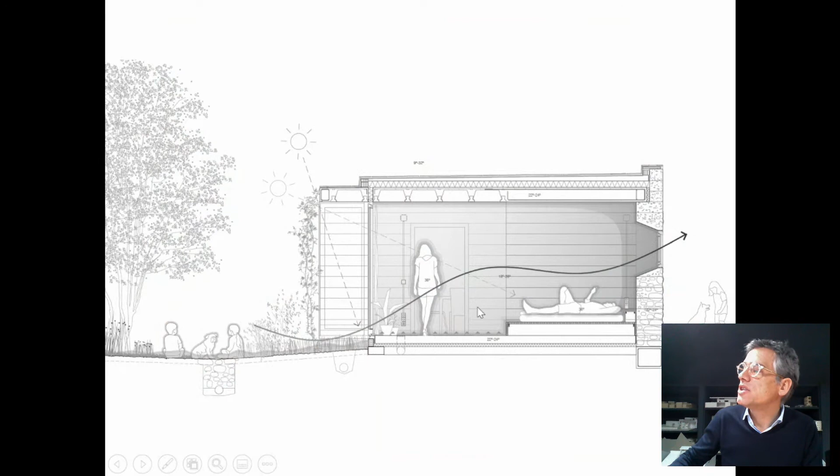So you get a kind of new, beautiful cave, where the density of the stones is less at the top because the structural performance matters more lower down. The insulation balls are denser in other areas because the structural performance is less important there. That basic geometrical condition produces spaces that open to the street.

At the end of the construction you get these lime concrete walls, but by drilling a little over the wall, pushing a bit over the whole surface, we recover the old stones of the former wall in order to give back to the street the old color and texture of the former wall.

So this is the former wall, and this is the new place for the new facade, showing the same stones that used to be just two meters to the left. On the other side, the house is a pure porch, completely open in summer, and a nice greenhouse in winter because of its south orientation.

It works basically by itself in terms of climate design. It's basically a passive house with a lot of inertia, a lot of insulation, and nice south-oriented windows.